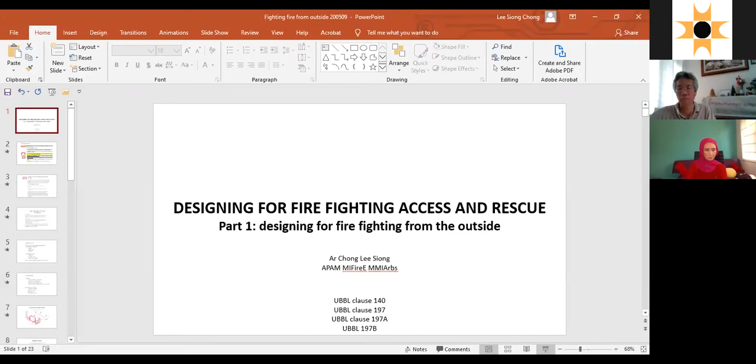This series of seminars or papers that I've written over the years, in terms of the structure, hasn't actually changed much, because the methods of fighting fire, the concepts of fire safety, the concepts of design, and all that is really very well established. The characteristic and nature of fire has not changed. But what has changed is our built environment.

As we progress into advanced methods of using buildings, we find that the codes and bylaws, the framework in which we use to develop standardized laws, becomes a little bit like a shoebox. We have a set of laws. We say, okay, if your building is of this purpose, you follow this set of compliances, this set of laws. If your building is of that purpose, if your building is of that height, you follow that set of laws and that set of rules.

But as you all know, our buildings today are really very complex, because it's just moving along with our new way of living, the advancement of society. As we speak now, we're using technology to be working from home. And in terms of workspace, over the last few years or so, there's been a big proliferation of co-sharing office spaces, for example. So the previous ideology of an office space being just like that, or a place of assembly being just like that, or a restaurant being just like that, perhaps the boundary starts to get a bit blurred.

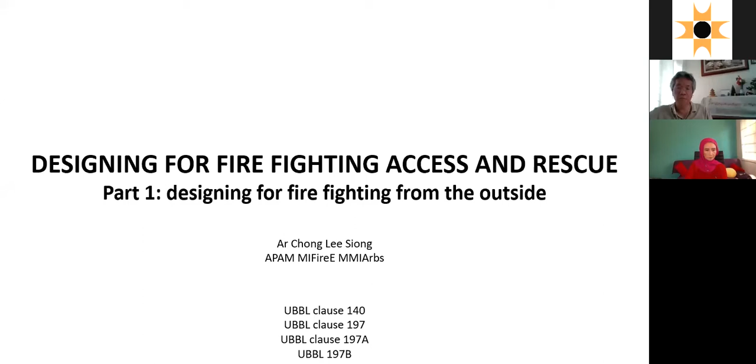In terms of firefighting access and rescue, there are really two parts to it. The bylaw isn't written specifically into two parts, but it's really about fire appliance access, and the provisions for installations inside the building. So there are two parts: one is fire appliance access from the outside, and the other is installations within the building. Let's look at fire appliance access.

We are all very familiar with this now - Clause 140, the revised one under UBBL 2012. Fire appliance access - we've got access way to be provided to the site, we all know that. And we've got access way positioned to the nearer edge of the building, centre position to the access opening, tangential to the access opening. Then there's also a mention of something known as an access road. The access road shall be laid on an incline not exceeding a gradient of 1 to 8.3 and all that. But then there's also an access way. So we have three components here: access way, access road, and access opening.

Now, as far as our UBBL is concerned, it started way back in 1984. The structure of the UBBL was from 1984, and that in turn was a collation of all our previous colonial era building codes and building standards. So access way is just one item that has been in the UBBL since day one - it hasn't actually been upgraded or redefined. When we did UBBL 2012, this particular clause was brought in, introducing two other elements called the access opening and the access road. But that is about the only mention of access opening and access road in the current UBBL. There are no other descriptions or references as to what constitutes an access opening and what exactly is an access road. That's the current situation.

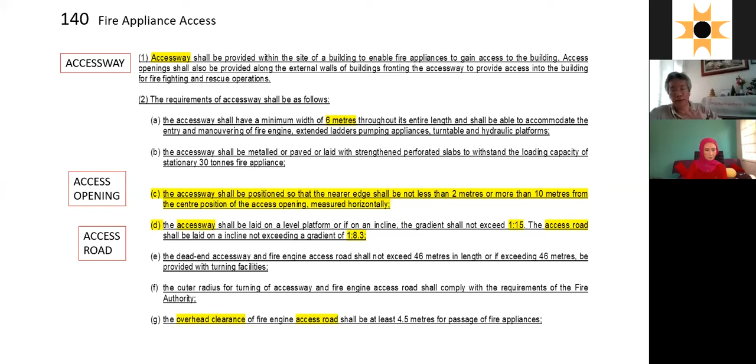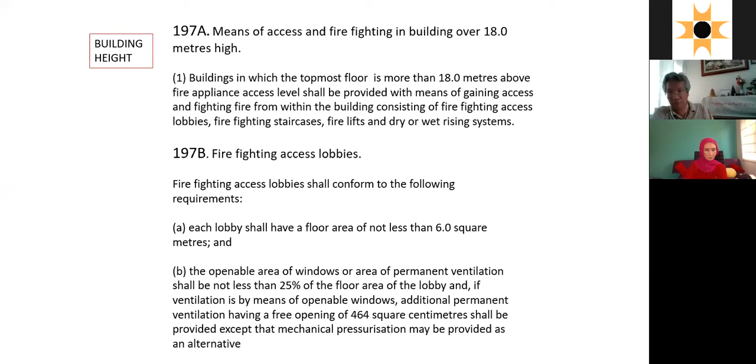This is on the outside. Now on the inside, we've brought in - we pulled some of the description from Part 8, the active systems, into Part 7, the passive systems. Means of access for firefighting in buildings over 18 meters - you've got the access lobbies, you've got the risers. So there are dry risers at 18 meters and wet risers above 30 meters, and so on and so forth. Here we introduce the element of building height with regards to the installation on how you fight a fire. So earlier on, you've got access to the building - roads, access ways, and access openings. Then within the building, by reference to building height, we've got these other means, which is the firefighting lift, lobbies, and the risers, etc.

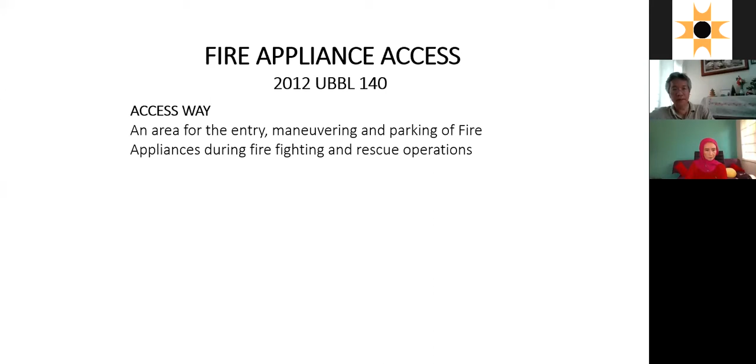Right, let's look back at fire appliance access - UBBL 2012 revision, Clause 140. An access way is an area for the entry, maneuvering, and parking of fire appliances during firefighting and rescue operations. Then you've got the access road, and then you've got the access openings.

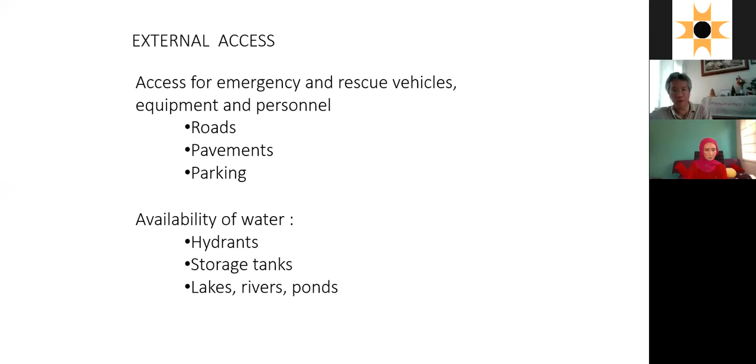Now, we've gone through all of this already earlier. Just to recap, access for personnel will be roads, pavements, parking, availability to water, etc. Yeah, we've all gone through this, but I'm just clarifying it again.

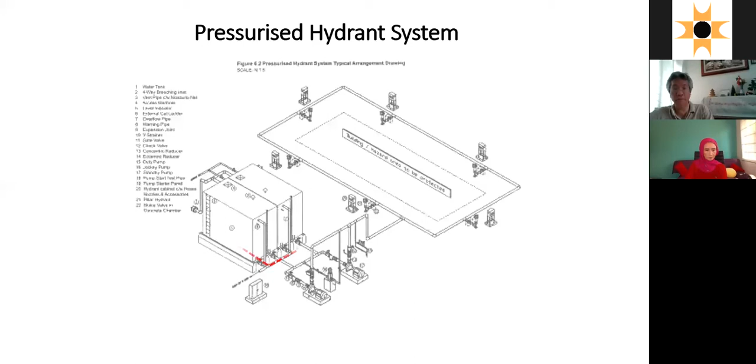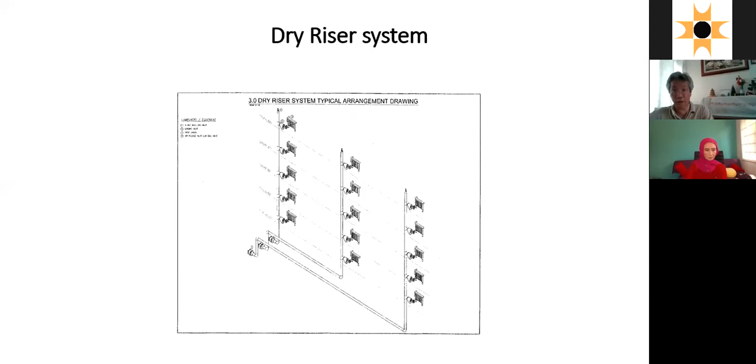And we also know about the built systems. The external built system in terms of water provision would be our external hydrants or a water source, a lake or a pond, an external water source. Within the premise of a large campus, a large compound, certain situations will require a pressurized hydrant system. We are familiar with all these installations of a pressurized hydrant system, and also with the installations of sprinkler systems and the commonality of the components involved.

And on the outside will be something very common. Every building in one way or another must have some kind of access, a road or something. And really, it should be near some kind of provision of a mass of water or external hydrants.

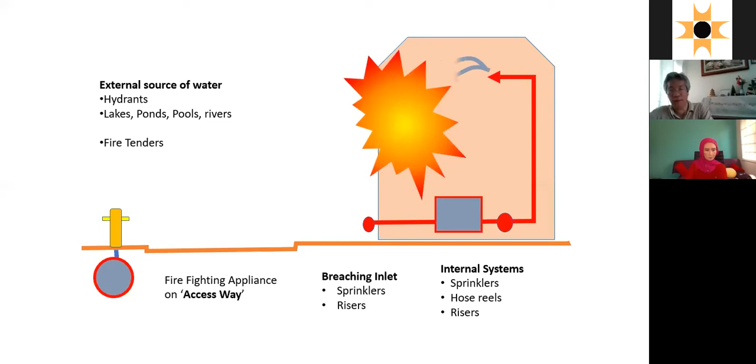If a fire breaks out, we know the internal systems fitted will be kicked into action automatically or by manual intervention. When the fire engine arrives on the appliance accessway, the whole purpose of the accessway is for the staging of the fire engines, for the firemen to be able to park the vehicles in a manner that allows safe distances for their operations, a safe distance away from the building. If the fire is actually leaping out of the building, they have to be a safe distance away. We call that the collapse zone.

The building has a vertical wall, aluminum cladding, glass, and all those things. There are things that will fall down from the building if the fire breaks out, so we need all these spaces, the little edges and all that.

The intention of the appliance accessway is first to park the fire engine, and they're actually doing two things. If they have to fight the fire on the outside, meaning the fire is visible, leaping out of the window, they have to fight it from the outside as the primary means of controlling the heat to prevent it from spreading. That's where the fire engine kicks into position immediately. That is the most obvious kind of fire. Firemen arrive, they see fire leaping out of the window, and the first company that arrives at the scene would immediately strategize and position the fire tender so they can address the fire, depending on the height of the building and where the fire is.

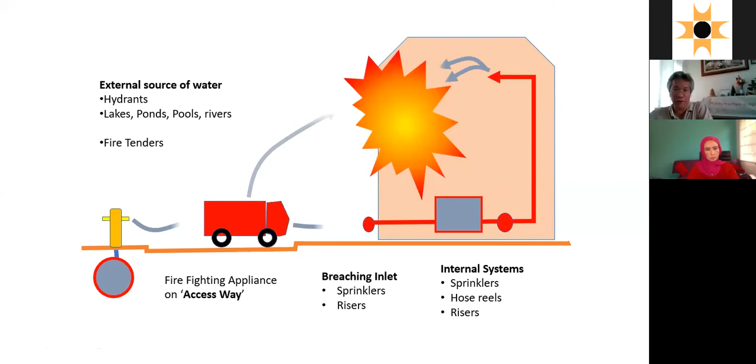Secondary, if the building is installed with internal systems, they need to connect the fire engines, the pumps, to the external source of water so they can feed it into the internal systems. We will be talking about the internal systems next week. So today we'll be looking at this application on the left-hand side, the fire engine on the outside, and what is the relevance of our current bylaws and what are the inadequacies.

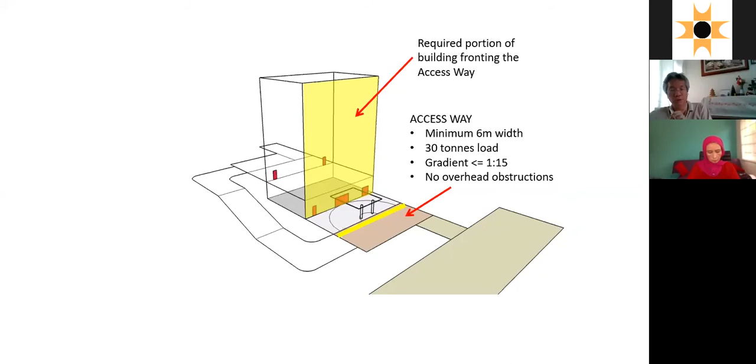Okay, we are very familiar again with these diagrams. I've shown it before. We will be going through more details on the internal systems next week. Just to recap now on the external, we've got the access road, the access way, and we've also got the access openings. These are the three elements we've identified: access way, access road, and access openings.

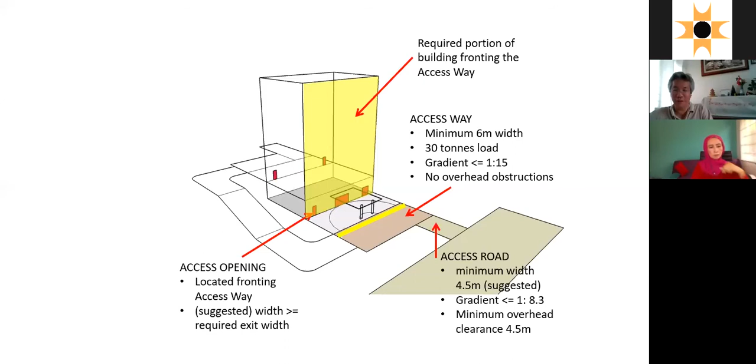The current UBBL 2012 really only specifies how you provide for an access way. It doesn't say much or anything about the access road, other than that you'll need an access road to bring the fire engine to an access way. And it's even more silent on access opening—there's only one mention of access opening in the UBBL, referenced like a secondary thing.

It says that with regards to the edge of the access way, the minimum edge is 2 meters, maximum edge 10 meters to the access way. The only reference to an access opening is that this edge is to be measured tangentially to an access opening, so you have to measure it this way: minimum 2 meters and maximum distance from the access opening 10 meters. That is the only mention of an access opening in our current UBBL.

Okay, later on I'll tell you what happened and how it arrived at all this, and what's the relevance of access opening. Access opening, we'll be talking a lot more about it next week. So today we'll be talking about access way.

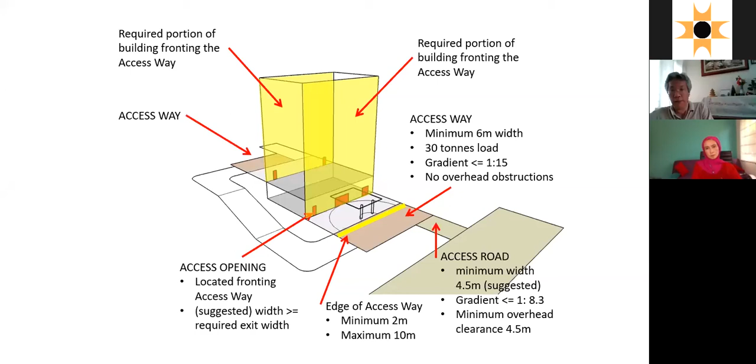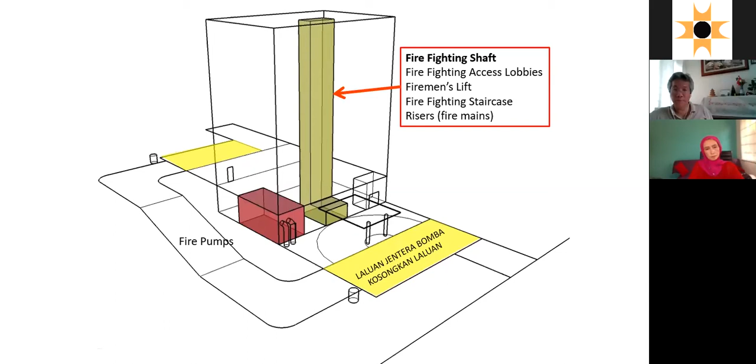And we are also looking at the internal systems, the relevance, the relationship between an access way, this laluan jentera bomba, to an access opening and to the internal systems. There will be the firefighting shaft, the fire pumps, the emergency power generators, the breaching inlets, and the allocations of hydrants.

I'm sure we're all very familiar now with how we position the hydrants. Hydrants should be positioned 90 meters straight line measurement, or hose line measurement, from hydrant to hydrant. But more important, the thing that most of us actually miss out is the relevance or relationship

between what is known as a breaching inlet to the nearest hydrant. I will be discussing this, giving you a lot more scenarios next week, because this will then be related to fighting the fire from inside the building.

The breaching inlet is generally the point whereby it's like an open tap for the firemen to be able to bring outside water, primarily from the hydrant, to be able to go through the fire engine and to pump it into the firefighting systems inside the building. So that's a key connection.

All the water tanks, the sprinkler tanks, the hose reel tanks, and the wet riser tanks - the building is equipped with wet risers. The building has got a certain amount of water ready at any time. But as the water is being used with the discharge of the sprinklers and the firemen opening up the internal risers, we need to have a constant supply of water.

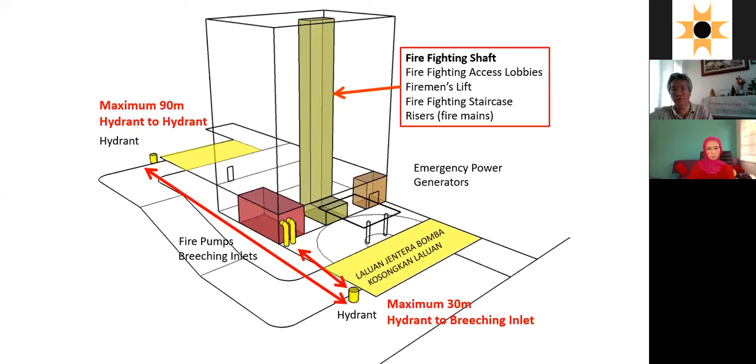Now, how do we determine, how do we specify the location of a fire appliance access? Actually, the bylaw doesn't give any laws to that. The bylaw is just a law, as I've always said. It just says that it has to be like that. But it doesn't give much clue as to, firstly, why do you have to do it, and secondly, how should you do it?

In our UBBL, for all these years, the specification of the appliance access way is dependent on building volume. Generally, the bigger your volume, the greater the percentage of access way required to front the perimeter of the building. It's been like that since 1984.

And I'm sure prior to 1984, in the old British Ordinance, they would have done the same thing. It is still the same today. Now, I'm not saying that the UBBL is outdated in that sense, but this is one of the many criteria that we should be applying in the designing of fire appliance access.

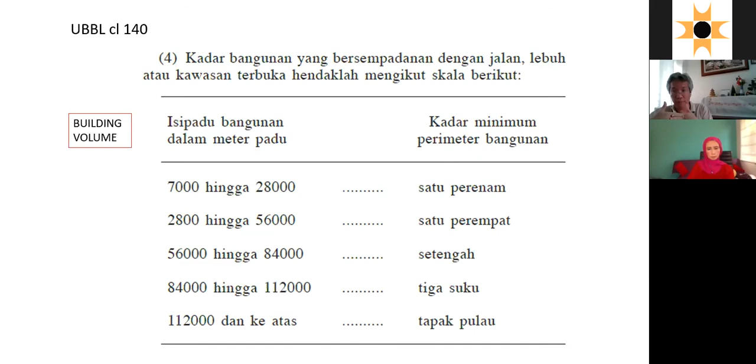Okay, let's look at a few scenarios here. By building volume, UBBL: 7,000 cubic meters to 28,000 cubic meters internal volume of the entire building, not just a compartment, requires 1/6 of the perimeter of the building to have a frontage to an access way. From 28,000 to 56,000 cubic meters, it's a quarter of the perimeter. From 56,000 to 84,000 cubic meters, it's half of the perimeter. Up to 112,000 cubic meters, it's 3/4. And anything above 112,000 cubic meters, you need an island site.

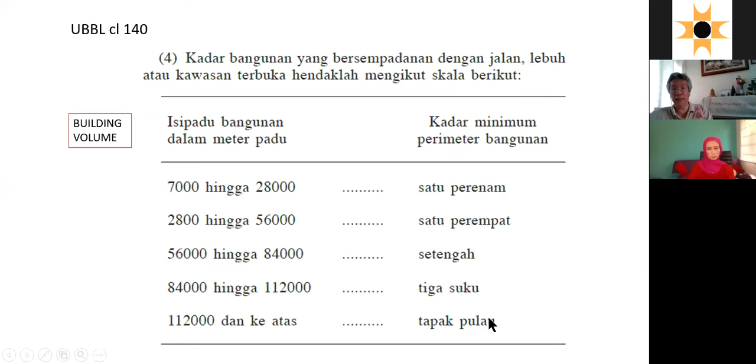Right, let me show you some examples. Taking a very hypothetical cube of the building, let's start with this small cube. This building is 30 meters wide, 30 meters long - essentially a cube, 30 meters by 30 meters by 30 meters high. This building will probably be about 6 to 8 floors, depending on the floor to floor height, but the number of floors does not matter in this situation - we are only talking about the building volume.

So that's 27,000 cubic meters - definitely more than 7,000, and just a little bit less than 28,000 cubic meters. So the bylaw says you need 1/6 of the perimeter of the building fronting a fire appliance access. 30 meters, 30 meters, 30 meters, 30 meters - that's a perimeter length of 120 meters. So 1/6 of 120 meters is 20 meters. So there you go - we have 20 meters, about 2/3 of one face of the building, which by law, in accordance with the bylaw, requires this frontage of an access way. So far so good? Good.

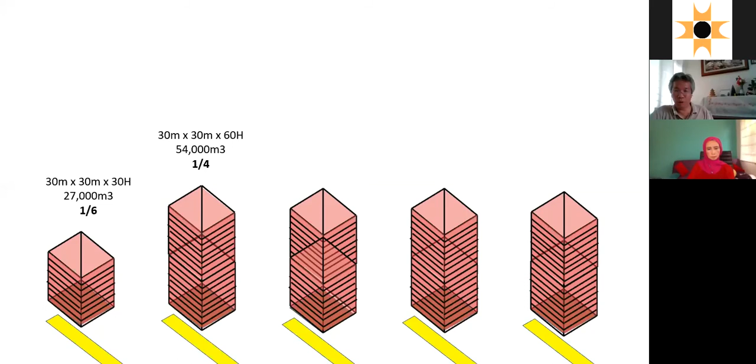Now, the same volume - I'm going to double it, adding another cube on top of that cube. So what's the volume of this new hypothetical building now? It's 30 meters by 30 meters, and now 60 meters high. 60 meters high would probably equate to a building about 15 to 18 stories, depending on your building, but again the number of floors does not matter - we're talking about the internal volume of the building.

So in accordance with the bylaw, this is just a little bit less than 56,000 cubic meters - we will require 1/4 of the perimeter to be fronting an access. So again, 30 meters, 30 meters, 30 meters, 30 meters - 1/4 of 120 meters is the entire frontage of this face. So that complies with the bylaw. If you do a building plan like this and send it over to Bomba, as far as fire appliance access is concerned, they cannot say no in accordance with the law. But of course, the fire department has every right to give you further instructions to do what's necessary - that is their privilege, and I think that's something very important. They must be able to do that. It's very important.

But yeah, if you're talking about strict compliance with the bylaw, this is what happens. What if we add another cube to the building? Now we triple the volume of the initial building here.

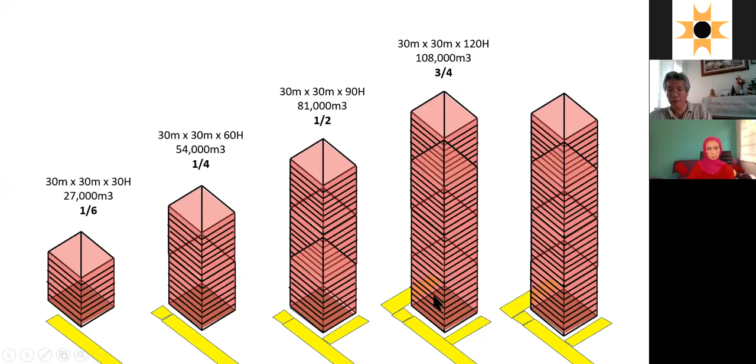And let's go even higher. 150 meters high - how many stories will this building be? 150 meters high, 40-over stories. Really serious skyscraper. So again, it's 30 meters by 30 meters, 150 meters high, and this one requires an island access around here.

So see the relationship here. Now again, what is the purpose of a fire appliance access? From the gist of the bylaws earlier, the fire appliance accessway is to front a building, to be tangential to an access opening, to be able to get inside. But primarily it's actually also to try and fight the fire from the outside, shoot the fire breaking out of the building.

So if you look at this same scenario, if that building catches fire on the far side of the fire appliance accessway, and if the bylaw says we only need 1/6 of the building fronting, and we have that minimum compliance, but this particular building has windows all around, the fire is actually breaking out on the far side. How would a fireman address fighting the fire from the outside in this situation?

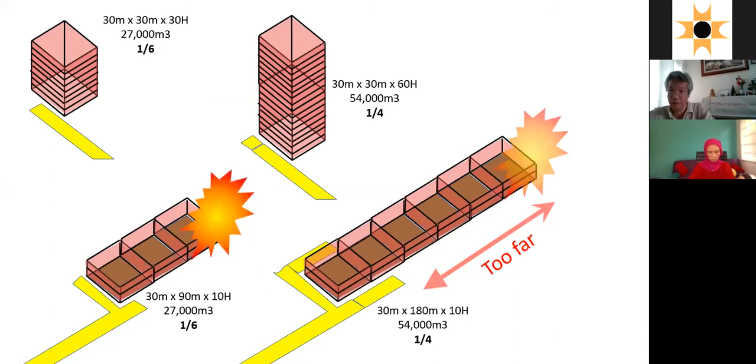Now, this is with strict compliance to the bylaws. So what I'm saying here is this: just minimum prescriptive compliance to the Uniform Building Bylaw does not necessarily mean you have met the performance criteria.

When we design things, we must always understand what actually is the performance criteria. The bylaw is just a set of guidelines, just a standard framework from which we say, oh, have we exceeded the law? Can we do that? Can we not do that? Purely by law. But we do have to understand, when we design our buildings, we must really, really understand what are the actual performance requirements for fire safety so that we can allocate it adequately.

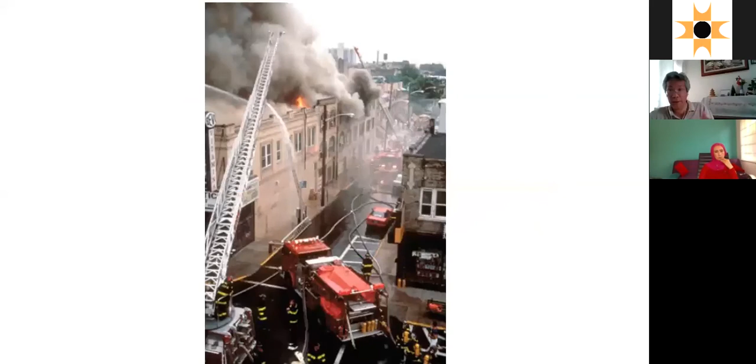These are, okay, the next few pictures, I pinched it from the internet. So they are not mine. I did not give any credit for these photographs, but never mind. I won't be publishing these photographs, so just look at it. All these are from the internet, so they're all overseas examples.

If you've got a long building and there's a fire there, it's an external fire in this case - external fire means the fire is breaking out of the building, risk of cladding collapse and all that. You look at the mess that's required out here. The way the fire engine, like this particular one, has to be angled in that particular direction, and the turntable ladder has to be placed in one particular direction to be able to reach. And then there'll be the supporting tenders pumping water from the hydrant to feed into the tender, to then feed back into this pump, into this engine in position for it to be able to reach the fire. This is the fire appliance access. Of course, this is the main road outside, but yeah, it's serving the function of a fire access.

Fighting fires on high rise up to a certain limit. When the firemen arrive at the scene, how they gauge where to park the fire tenders and the turntable ladders makes a difference. If the fire is up there, then you have to park accordingly. If the fire is lower, they actually have to park the turntable ladder further. If the fire is higher, they'll have to park the turntable ladder closer to the building.

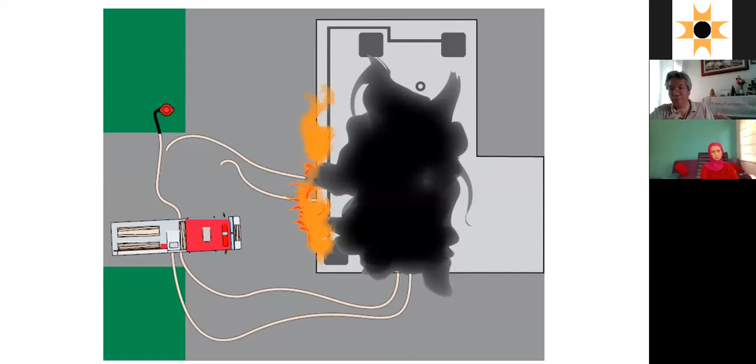An aerial view. Fire appliance access in our mind has always been diagrammatically drawn parallel to a building, 6 meters wide, that's it. The bylaw asks for minimum 6 meters, and we give them the minimum 6 meters.

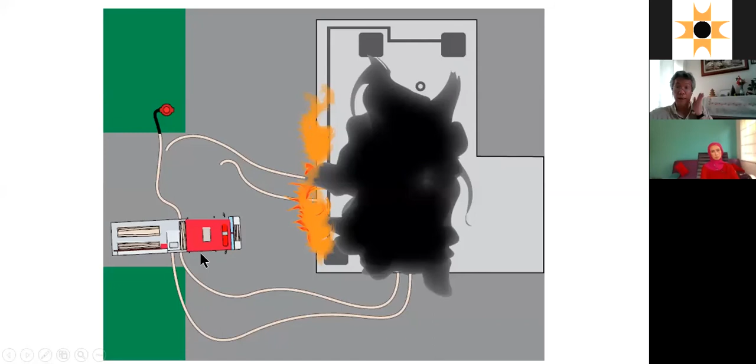But if you see how firemen manage their operations, not necessarily do they park by the side, because if they park by the side, they have no more room to do the staging. Very often they actually come in here and approach the direction of the fire tangentially.

Now, going back to how we arrived at the revisions to the bylaw in 2012, where we introduced the concept of the access way, access opening, and the access road - actually, we pinched it from the Singapore Fire Code. But that's another story as to how we incorporated some things but left out a lot of things. I'll talk more about the fire appliance, the fireman's access, the access opening into the building next week, because that one would be on fighting fire from the inside. So that would be next week.

So today, let me look at this. The Singapore Fire Code has got a more defined way of prescribing fire appliance access. Of course, it is from the Singapore Fire Code that we extracted the description of an access way.

We extracted the recognition that not all roads need to be access ways, that there are things known as access roads. And it is also from the Singapore Fire Code, and actually international, the access opening. In Singapore, they call it the FAP, Fire Access Panel, which is actually an access opening into the building. I will talk a lot more about that next week.

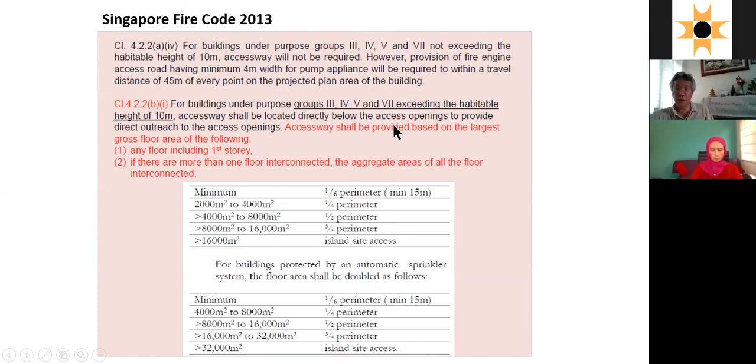But certain buildings, which is actually most of the buildings, primarily the commercial buildings, groups 3, 4, 5, and 7, the accessways are prescribed by floor plan area, building plane, but not exactly a building plane. They're looking at the biggest floor plate area of the biggest floor plate. They don't go by building volume, they're going by floor plate. How big is that plate?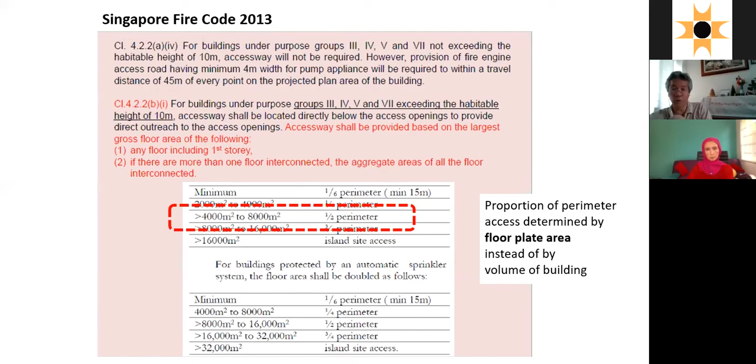Right, so if you look at these prescriptions over here, let's just take an example: 4,000 to 8,000 square meters - square meters now, not cubic meters, square meters now. Half of the perimeter, half of the length of the perimeter of the building would have to have a frontage to an access way. Now let's take our scenario here.

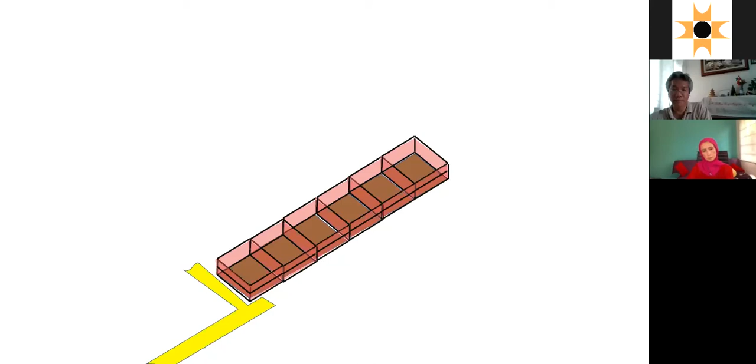Earlier on, we now added that. So there's a fire. According to the UBBL, it's 1/4 by volume, and we say then it's too far to reach the fire, right?

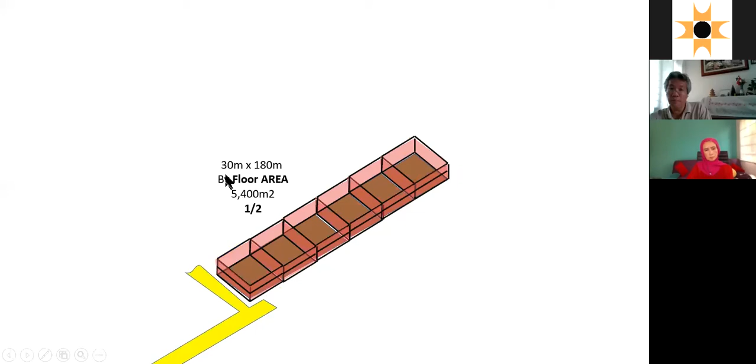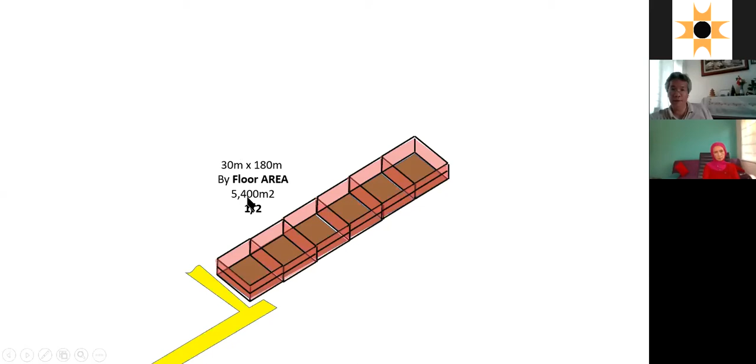Okay, now if we use the Singapore code, this same building would be by floor area - just one floor, not the volume, not the overall gross built up, just one floor plate, the largest floor plate, 30 meters by 180 meters. It's 5,400 square meters. So that one falls under the category that you need half of the perimeter for a fire appliance access.

So if a fire occurs there, what is half of the perimeter? You need a fire appliance access way this way. If you're building the same building in Singapore, you will be building it this way. Okay, I think I'm just about at the right time. I'll stop here. Perhaps I'll hand it back to Sophia for questions and answers.

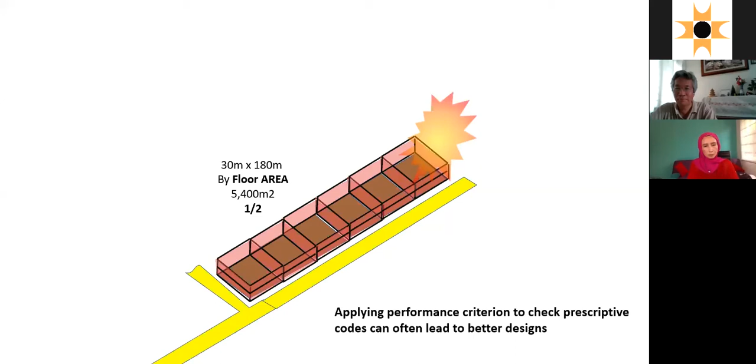In the case of the horizontal block, it's quite interesting that even though we comply with UBBL, the building is still at risk for rescue. So in normal circumstances, wouldn't we consider that the hydrant positions at 90 meters at the end will be reached by the fire officer, and that would be the way? Is that because the building is quite low? But for a tall building, of course, it may be difficult. That's another system — you have to come from air, I suppose.

So what do you think? Wouldn't that be the purpose of the hydrant? Actually, it is — that is precisely the thing. The hydrants are to be located 90 meters apart, and every building must have access to a hydrant.

But the bylaw actually stops there. It doesn't say anymore. It just says every building must have access to either a hydrant or a body of water that allows a fireman to pump, and hydrants are to be installed 90 meters apart. By inference, as I've always said, if you have a hydrant, you must have at least an access road to reach it. And if your building has internal systems like a breaching inlet, the nearest hydrant must be no more than 30 meters away from the breaching inlet, with an access way in between.

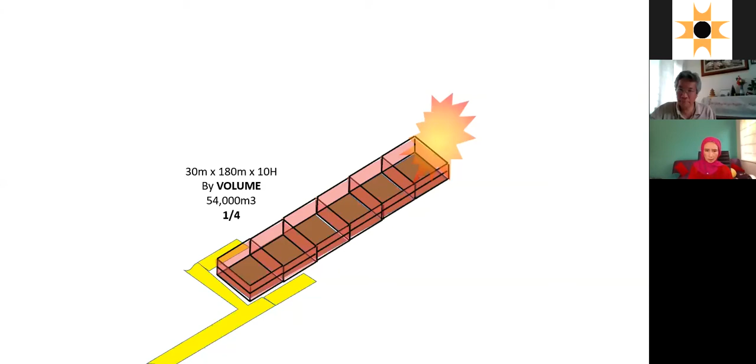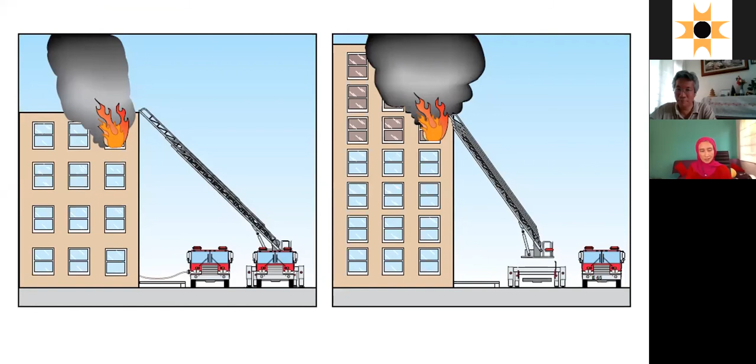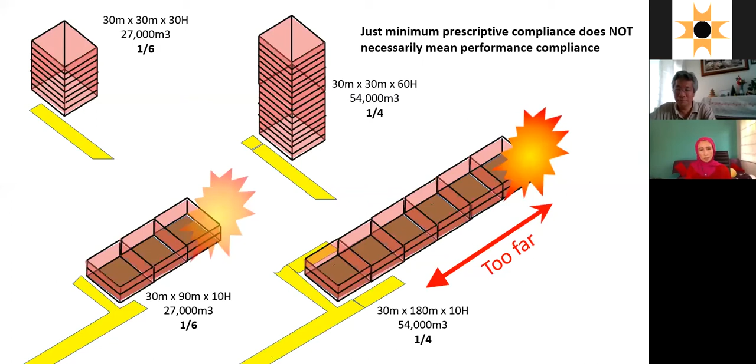And for the case of high-rise, that's a different scenario. If what you're saying is true, there are quite a lot of buildings in KL now that are at risk of rescue in the event of fire. That requires a completely different rescue system, from the air. I don't know how well equipped our Jabatan Bomba is to rescue from air — I'll be talking about that next week.

That is in particular reference to the fire access opening, the Singapore term FAP. In Malaysia, we don't have any more description on the access opening other than that little reference in the bylaw. But in general, what it means is that if the building goes beyond 30 meters, you will not be fighting fire from the outside.

So this is my illustration here, to show the potential fallacy of a one-size-fits-all prescription. Whereas a low-rise building which is long and narrow, or worse, very flat but very deep — like a lot of big factories we're doing today, these super mega factories — you would really want perimeter access all around, because you'll need a firefighting boom to come up and reach above the roof to point down at a fire breaking out in the middle of the building.

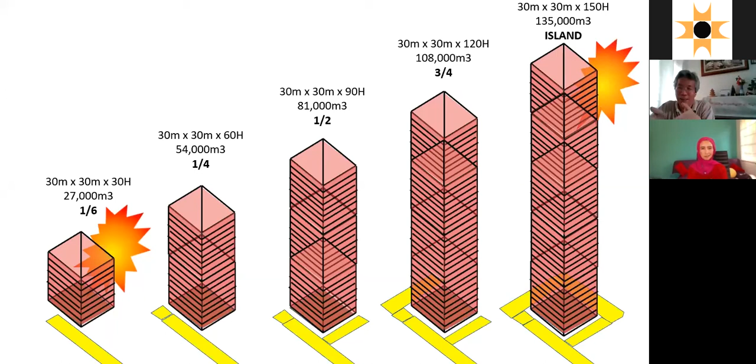And that boom needs access to park in this direction to reach in 6 meters — the turntable ladder itself is 15 meters long. So if the bylaw says fire appliance access at 6 meters, and you give them only 6 meters on a big factory lot, it's absolutely useless.

It's not going to work. Okay, so you're going to tell us more about it next week, right? Yeah, that will be on firefighting from the inside.

There's a question here from an anonymous attendee. Clause 140, the volume of building is only calculated based on the building above ground floor or accessory level only. That's correct. Is it inclusive of basement? No, in Malaysia it's only above ground.

Malaysia is now starting to look at underground buildings and underground connections within buildings. So what would be the situation here? I would imagine that will be covered under the requirements for firefighting shafts to go down to basements deeper than 9 meters. So firefighting shafts are required when the building goes higher than 18 meters above ground, and higher than 30 meters you need wet risers, etc. So it's governed by height. But if you turn the whole system upside down, firefighting shafts will be required for basements lower than 9 meters.

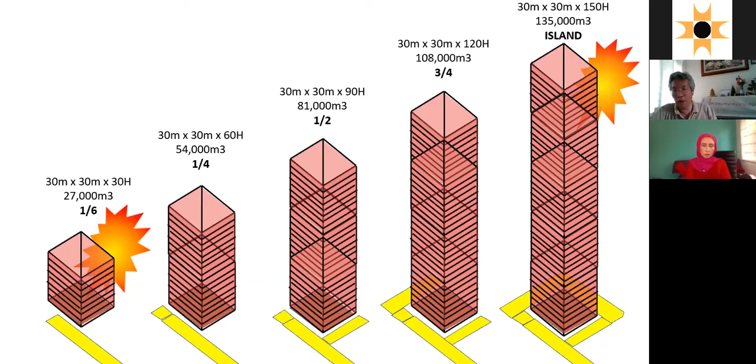There's also the relationship between how we do the building. If there's another building on top of this underground building, the relationship between the top building and the underground building is also specified. Again, the bylaw is just a framework. We really have to read this and that and pull everything together to come up with the overall picture. If you like, next week I can throw in one of my slides that describes that general arrangement, and we can discuss it further then.

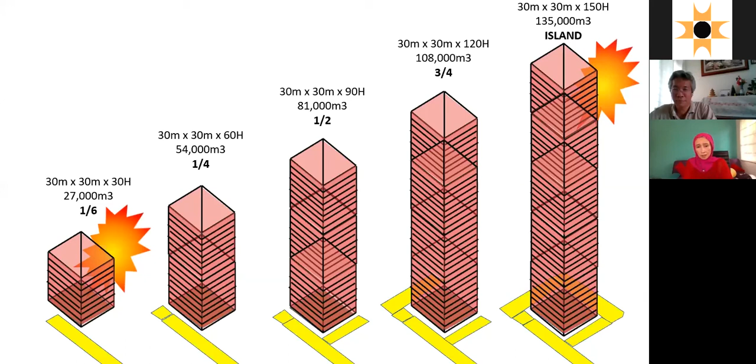Okay, another question from Adam Lu. With regard to the maximum 10-meter distance between the accessway and the building access opening, how do some buildings with a huge piazza between the building and the accessway, in some cases more than 20 meters distance, deal with this restriction? Okay, the fire appliance access may actually be demarcated - let me rephrase that. That piazza or plaza may actually be the fire appliance accessway, and in many instances it is.

Yeah, a fire appliance accessway is not a road. It doesn't necessarily have to be a road. It can be grass, provided you design it such that it can support the stationary weight of the fire engine. In Singapore, they prescribe 30 tons. In Malaysia, I think it's 25 tons - I can't quite recall. Right, so it doesn't have to be a road.

It's a bit like when we talk about car parking bays. What is a car parking bay? Does a car parking bay need to be pre-mixed concrete? No. You can park cars on grasscrete. Many people park cars on pedestrian pavements, that kind of thing. So it's the same with the fire appliance accessway - it's just a platform, a parking platform for firemen to stage and maneuver the fire appliances.

So very often, when you see a plaza with no roads around it, how does a fireman get to there? Yeah, they're probably going to climb and physically drive onto the plaza.

Another interesting question: will there be any new amendments to cater for the issue of fire appliance access relative to the floor plate area? Oh, you mean in reference to the Singapore access example into the building, I suppose? No, not that I know of. Especially for buildings with slope, you know, access on top level and bottom level - there's always a question of the mid-level or where to define the ground.